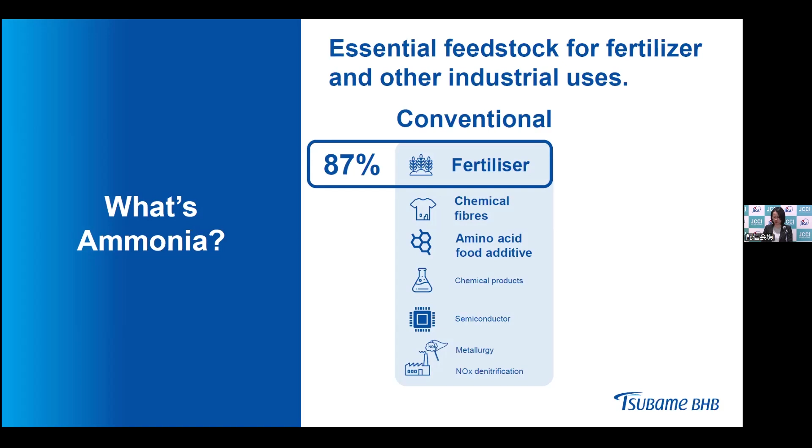But now, ammonia is expected to play an important role for our world's decarbonization. Ammonia is expected to be used for maritime fuel and power generation, as it doesn't emit CO2 when combusted. It is also expected as a high potential hydrogen carrier for the decarbonization of so-called hard-to-abate industries.

The world population reaches 9 billion in 2050, so we need more fertilizer and more fuel, which means we need more ammonia. However, the ammonia industry has 2 issues: its production is now limited to fossil fuel-rich countries, and there is a significant amount of CO2 emission in its production.

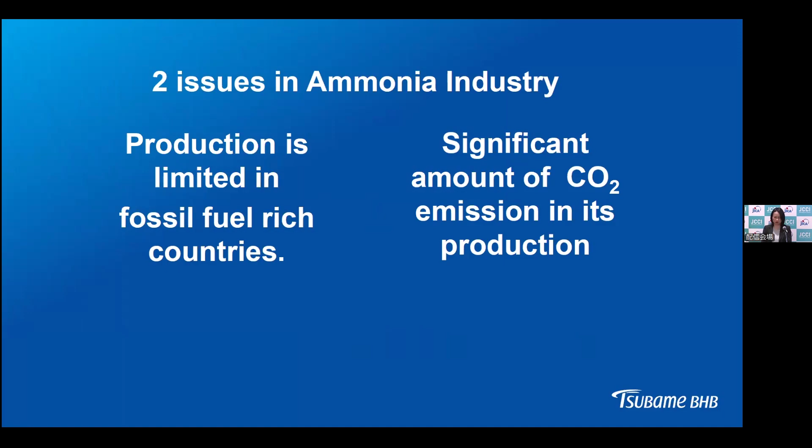The other big issue is that current ammonia production is from natural gas or coal, therefore it emits a significant amount of CO2. We have 380 million tons of CO2 emissions every year, and that accounts for 1 to 2% of the world's total CO2 emission.

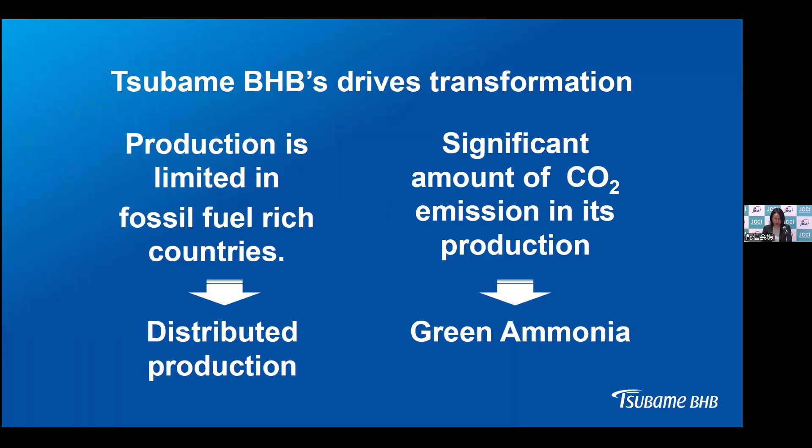To tackle these issues, Tsubame BHB drives transformation of ammonia production. The keywords are distributed production and green ammonia. So I would like to talk about our core technology, how we are going to achieve our vision.

Our core technology is an innovative ammonia synthesis catalyst named electride catalyst. Electrons contained in the catalyst perform as negative ions, and it enables ammonia synthesis at lower temperature and pressure compared with conventional technology. Ammonia synthesis under mild conditions has high potential to reduce energy consumption and plant cost.

Using this unique technology, we offer flexible ammonia production responding to the client's needs. For those with relatively small demands, less than 100,000 tons per year, we offer a distributed modular type ammonia production system, which we are mainly targeting for fertilizer local production or industrial uses.

The photos here are our first modular system for 500 tons per year production, which is now under installation. For those requiring large-scale production from 100,000 tons and above, for fuel and energy purposes, we offer a catalyst and basic design, which we target to launch in 2030.

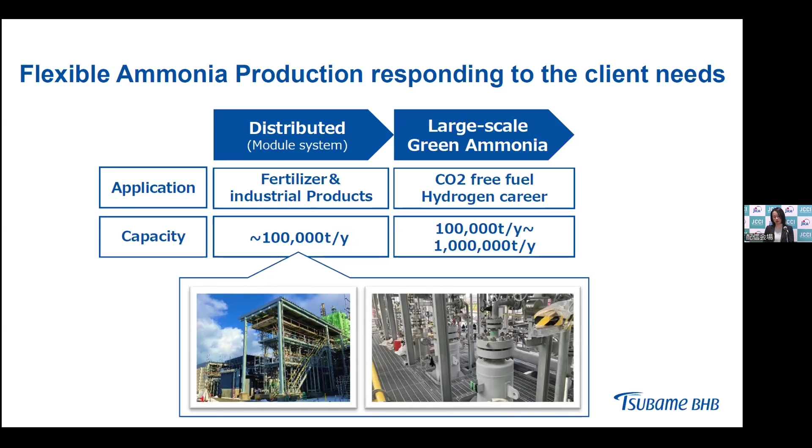Today I would like to introduce our low-carbon fertilizer production model. We generate hydrogen from water and nitrogen from air, then synthesize ammonia using locally available renewable energy. Then we transform ammonia into fertilizer in whichever form is required in each country.

Anhydrous ammonia direct application is common in North American countries, but the rest of the world prefers liquid or particle type fertilizer. This is the image of our low-carbon fertilizer plant. You can visit our VR plant from our website, using the QR code here.

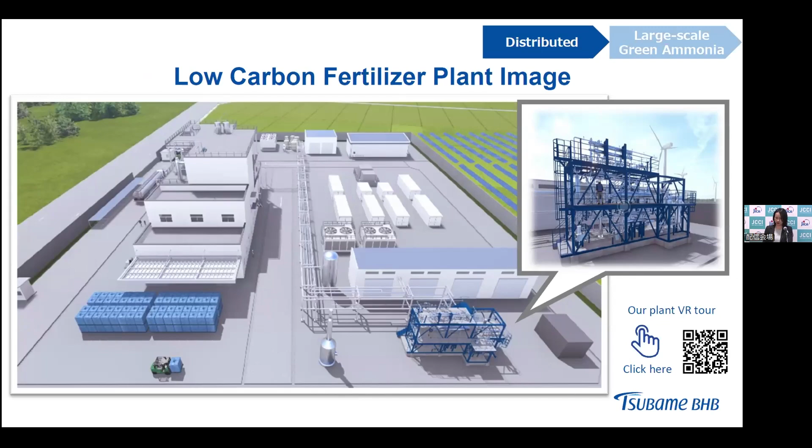Our flexible and distributed solution enables ammonia and fertilizer production in the demand area. So we can mitigate the client's global supply chain risk and also contribute to significant CO2 emission reduction in long-distance transportation.

Also, producing ammonia with locally available renewable energy, we can graduate from fossil fuels and reduce large amounts of CO2 emission from ammonia production.

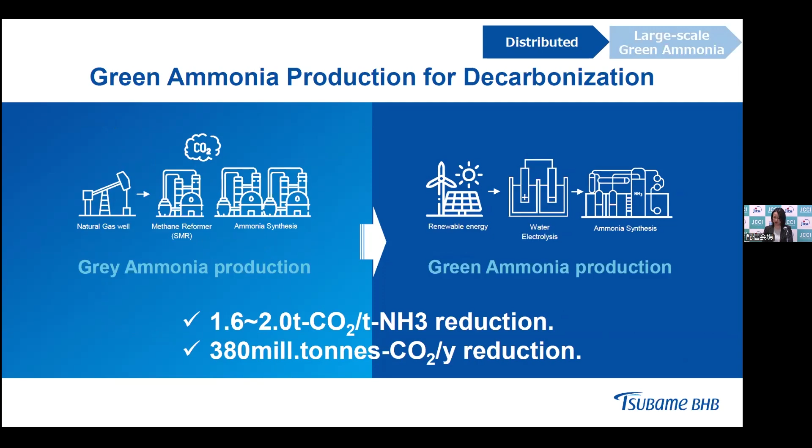So far, we have already received 2 commercial plant orders in Japan. EPCs are ongoing, and the first plant will be on stream in August this year, with the second one following 1 year later.

We have many project development discussions with global partners, so we are very happy to be connected with partners to develop this low-carbon fertilizer project in your country. Thank you for your attention.

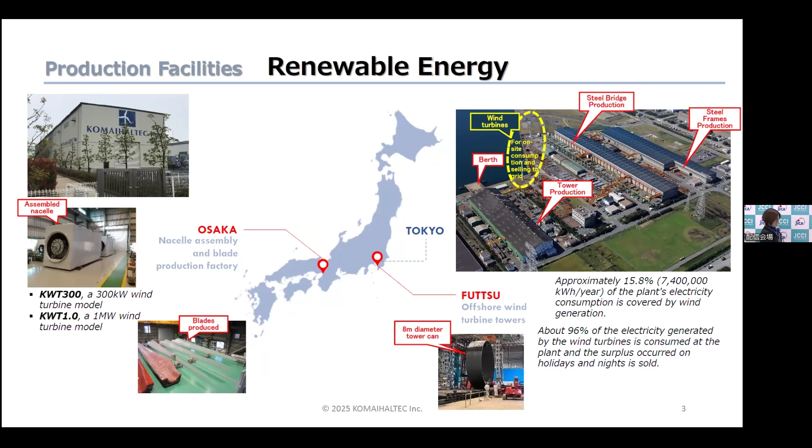Our energy business is based in Futtsu, Chiba Prefecture, and Osaka. In the Futtsu factory in Chiba, we manufacture materials for bridges and steel frames, and we have renovated part of that, and are now building a production line for offshore wind turbine towers. In Osaka, we manufacture mid-sized wind turbines.

This is the introduction of our products: the 300 kilowatt wind turbine models, with three different options. The first is for normal climate, the second is for cold climate, and the third is for typhoon areas. Rotor diameter is 33 meters, hub height is 41.5 meters, and nacelle weight is 18 tons - small size.

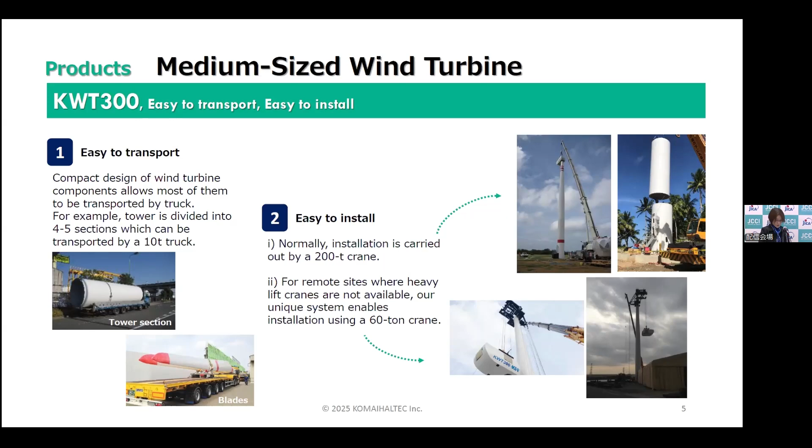We have strong winds in some parts of Japan, and roads can be quite narrow, so we make products and parts that are easy to transport and install. For example, this tower can be separated into 4 sections, making it easy to transport. Installation usually requires a 200-ton crane, but we have developed our own self-lifting system. Using this, you can install the wind turbine using a 60-ton crane instead.

In addition to the 300 kilowatt model, we have developed a 1 megawatt model. We know that the size of wind turbines is getting bigger, and for on-site power generation, demand is growing for wind power, so we believe the 1 megawatt wind turbine has a big market.

Again, we have the typhoon-resistant type, able to withstand winds up to 91.26 meters per second. We are prototyping now, and expect commercialization from 2027.

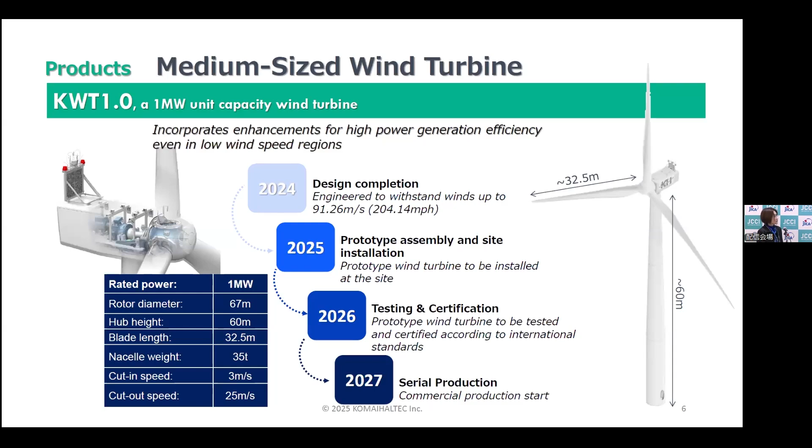This one is in Kanagawa Prefecture, Miyagawa Park. Wind power is used to power the lighting at night, and this is also a landmark for the local residents.

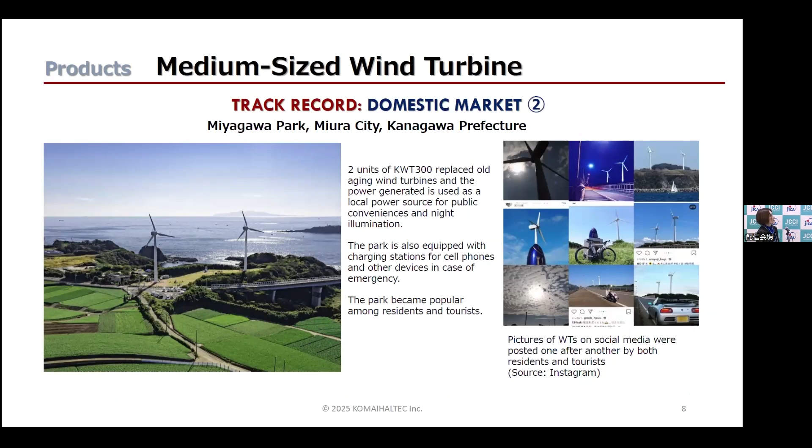This is an overseas example, two examples in extreme cold weather. Fuel transportation can be very expensive, so combining renewable energy with diesel fuel power generation can achieve very stable power generation at a lower cost.

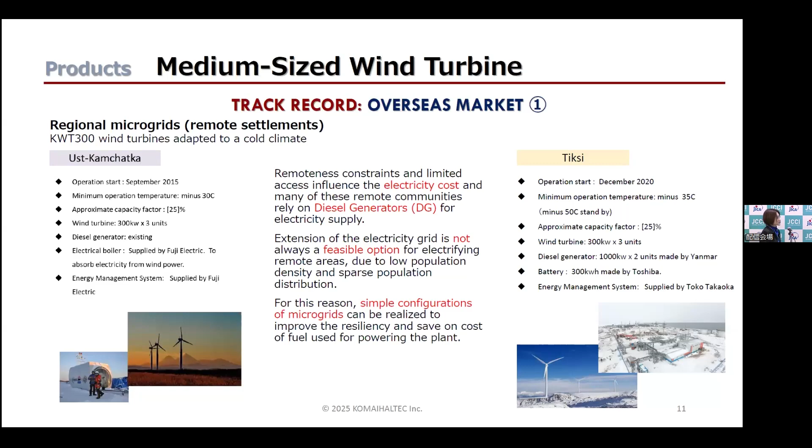These different sites require various types of solutions depending on the scenario and situation, and we can be flexible.

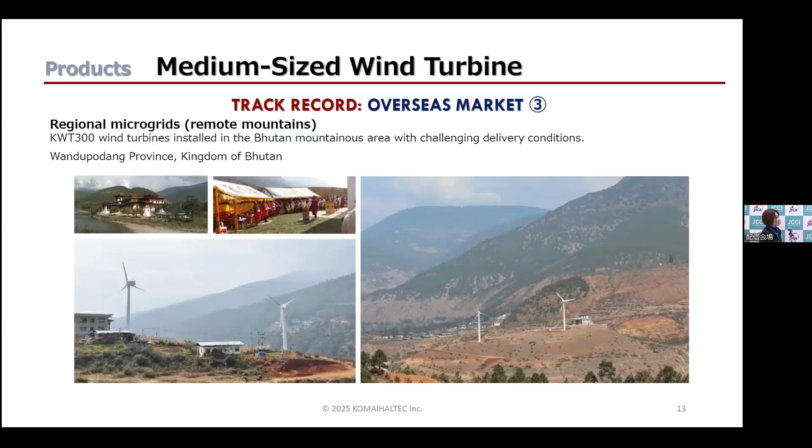ADB financed this project in Bhutan. Very narrow roads lead up to this small village in the mountain area, and they had to carry the parts and components for the wind turbines up there.

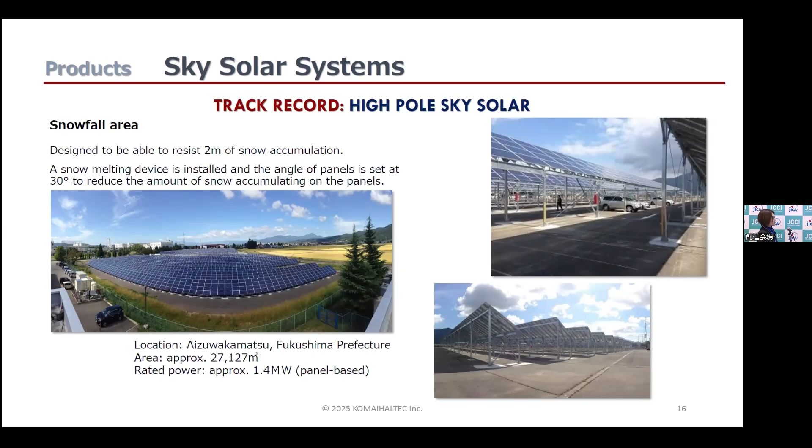This one is in Fukushima Prefecture, a parking space equipped with a solar system. There is a lot of snow in this area, so we have changed the angle of the solar panels to ensure it can withstand the snow, and there is also a snow melting device attached.

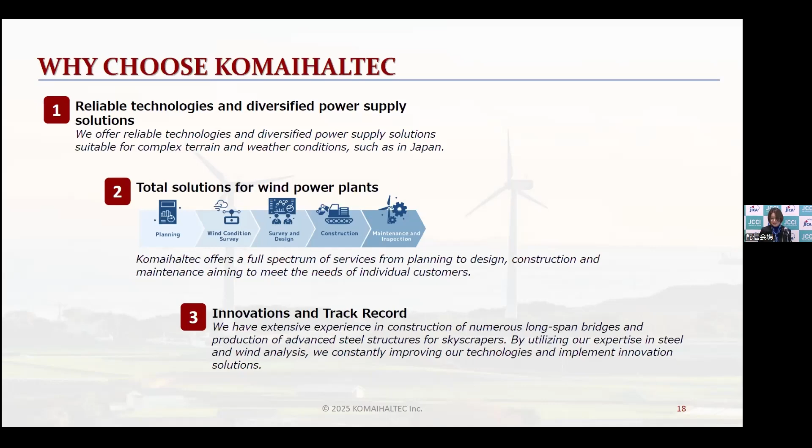As you can see, we provide a whole variety of different systems and solutions suited for each situation of our customers. In planning, design, construction, maintenance, we can do everything. With regard to maintenance, we know that some customers prefer doing maintenance locally, in which case we can also provide services to educate the local player to do the maintenance as well. If you're interested, please let us know.

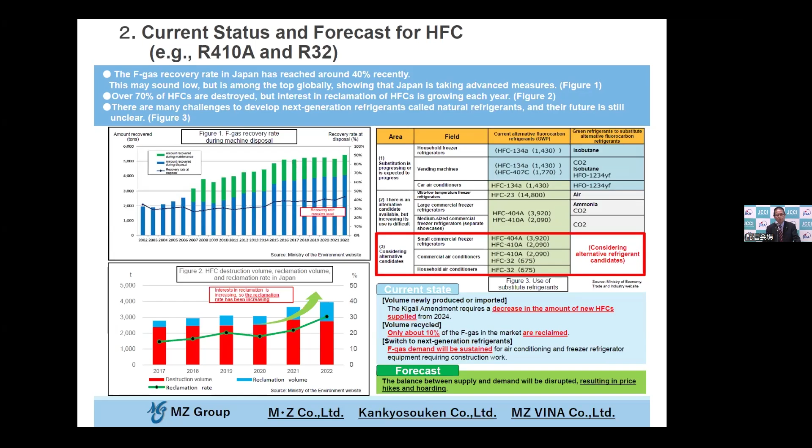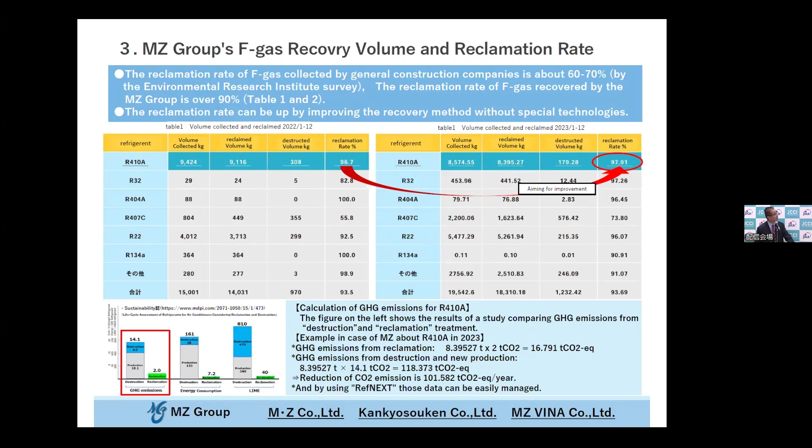So this is from the reclamation, utilization of the collected, recovered fluorocarbon. So F-gas, you collect them in normal time at 60-70% collection by construction companies such as General Construction Company. But in terms of when we recover and reclaim, it's 98%, very high reclamation rate, the reuse rate, because the right procedure and right tools are being utilized. And through that, we have a high ratio of F-gas being recovered and reutilized.

And this is just a reference. F-gas: collecting, recovering, and then reclaiming. The reclaimed F-gas, what's the situation? How much is being used? This is traceability, and we need to manage them.

So our company has a system called RefNext. Utilizing RefNext, the F-gas could be managed from recovery to reuse to being reclaimed. So if you're interested, please let us know, we will be able to share with you how this system works.

And following that, this recovery or collecting is important. Unless you recover them well, the reuse will not go up. So this is the content of the procedures that have been undertaken. It's in English, so it may not be clear, but for us, the ISO 9001:2015 is a certification that we have been certified with. So at all times, we analyze the content and then try to reclaim them.

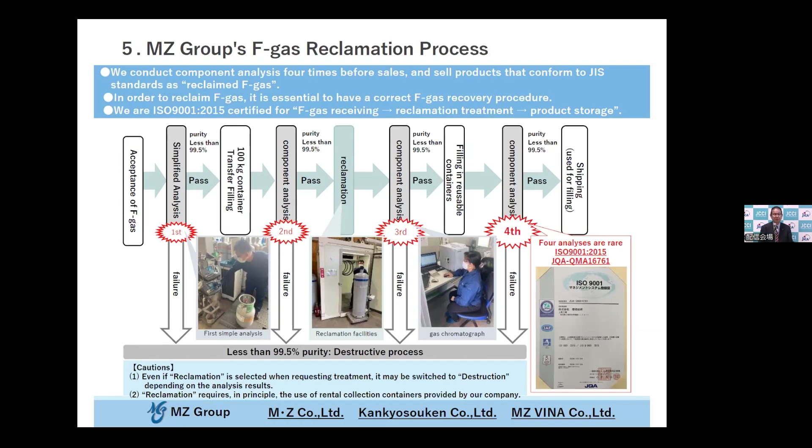So that will be the basis of the reuse. As you can see, it's small, but 99.5% we are now utilizing them. So for the reutilization of F-gas, there may be a concern about the quality of the F-gas, but for us, 99.5% and above, the fluorocarbon gases we would be able to reclaim or reuse.

So these F-gas and reuse of that overseas, for developing countries where F-gas is left without being collected, we also like to run an initiative outside of Japan. In Vietnam, Ba Ria-Vung Tau Province, we have a new company that we have established. So F-gas, as you can see, the customer brings to us the non-already used F-gas. So we visit a customer and we collect F-gas. First of all, it's collection of F-gas, and then, as I explained, the reuse technology nurtured here in Japan, we try to reuse them.

And also, last but not least, our collection of F-gas is a theme of our business, but alliance with the stakeholders or parties involved is essential. So at the beginning, when you think about collecting F-gas and the consumer, and collecting the F-gas and delivering the goods to us, we want to make the F-gas reusable.

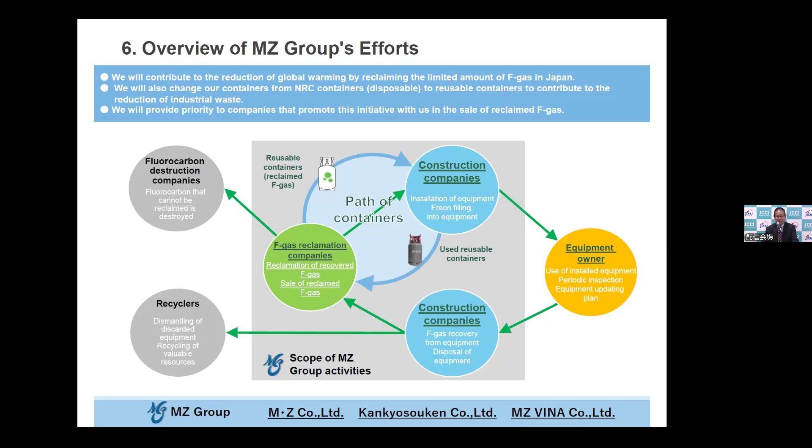So for us, in terms of the F-gas that we're going to reuse, these are the efforts that I would like to have you join on the journey, so that we'll be able to share and feedback the F-gas that could be reused once again. It has been very brief, but if you have any questions, please feel free to reach out. We have emails and home pages available. Thank you very much. Thank you once again.

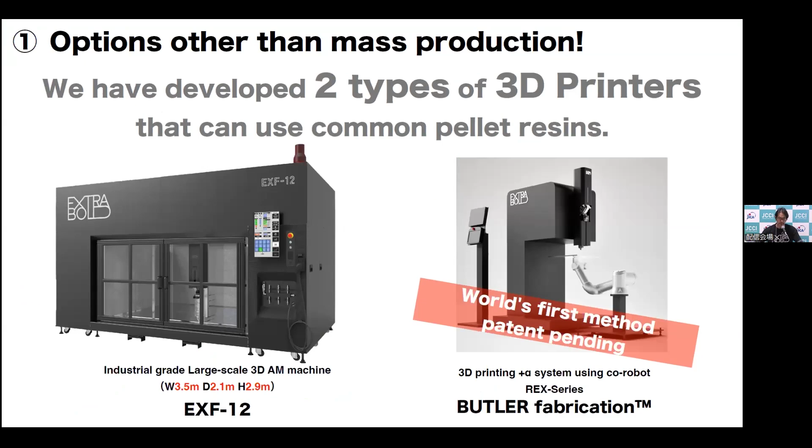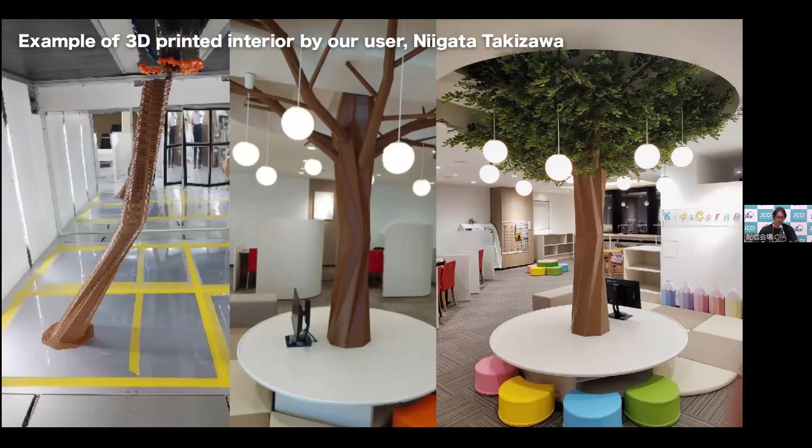This is our EXF-12 size, extra large 3D printer. The world's first collaborative robot-based 3D printer has been developed and is being sold by us. It's fast, offers a choice of different materials, and you can make something big. Last year in Thailand, our printer was used to make material for parts of a racing car by Toyota, and our materials are used for interior structures, organic-looking interior structures, for example, and also very sleek-looking walls can be made by 3D printer.

Everything can be recycled, so you can combine it with a recycle machine and use our printer, and this kind of recycling is already being achieved. This is a reality already today. Organic waste and recycled materials can be used to make new materials. I'll skip the difficult part, but we have level 1, 2, 3, 4, different levels of material making. Let me explain one by one.

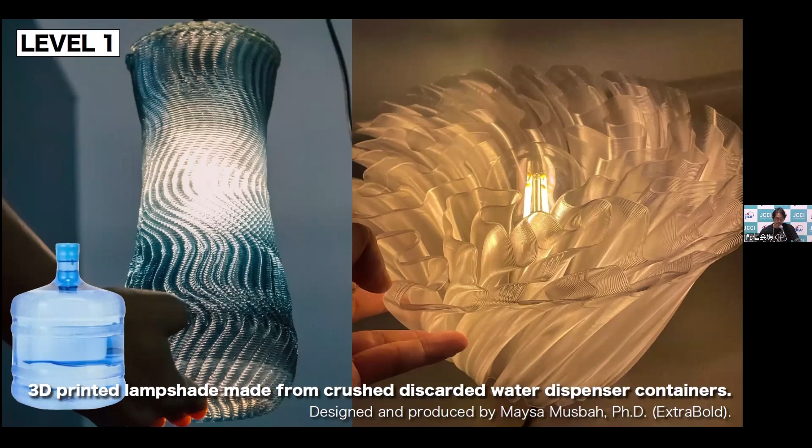First of all, we have level 1. Water server tank, these big plastic bottles, can be pelleted and turned into something else, like this very fashionable looking lampshade, designed by our own engineer/designer. Imabari City is using our technology, including our printer. Road cones, these triangular cones, can be pelleted and turned into Christmas tree ornaments. One ornament can be made in about 2 minutes.

Another example: if you have in-house waste within the company, when we make something in-house, what we make is provided free of charge to the employees. We use marine waste like this, in this case mandarin skin. When this is turned into powder, you can actually mix it with other materials. Anybody can do this, you don't have to be an expert.

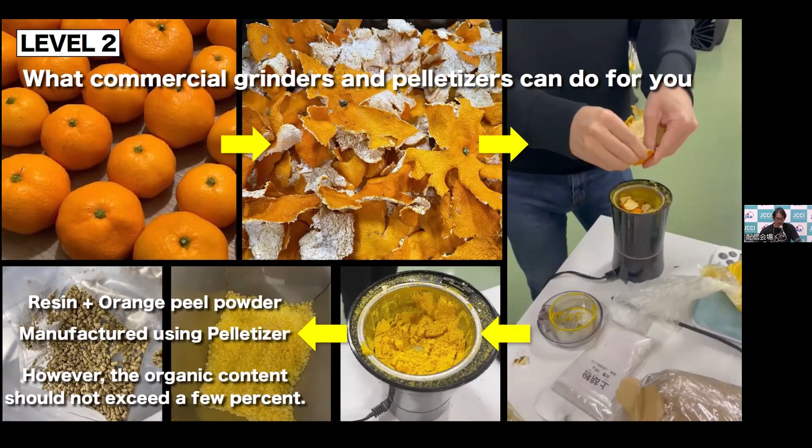So students and employees try to find more different materials for recycling and upcycling. This is something we tried with Toyota last year, where all sorts of different residual wastes are included, for example Lego blocks from your childhood, which means each material can have a story for different individuals, so the product made from the material definitely has higher value. That's level 2.

A Hiroshima City University student made this in 2 days from marine waste and wood waste. So manufacturing and creativity, if the young generation these days can master both, they can be really creative.

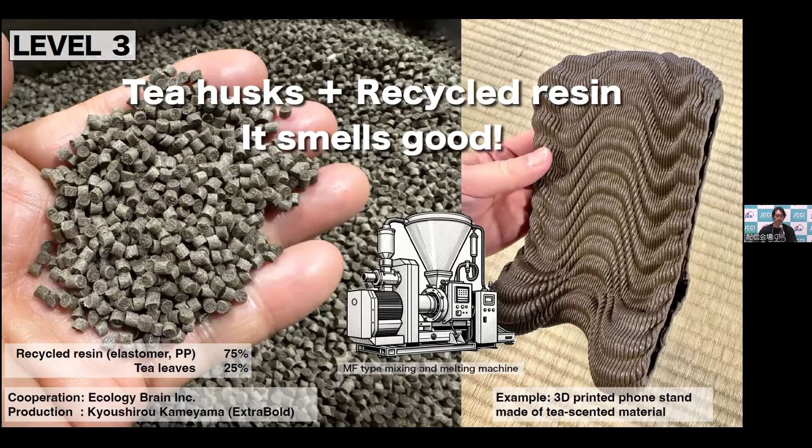This is MF fusion, a Japanese technology that mixes different materials with plastic at high melting point. In this case, used tea leaves are used, so you can smell tea. If you use coffee grounds, you can smell coffee out of this, another added value. You have no idea what's here, but this is a CD, DVD case, and also wine residues. You can mix all these different materials and manufacture chairs.

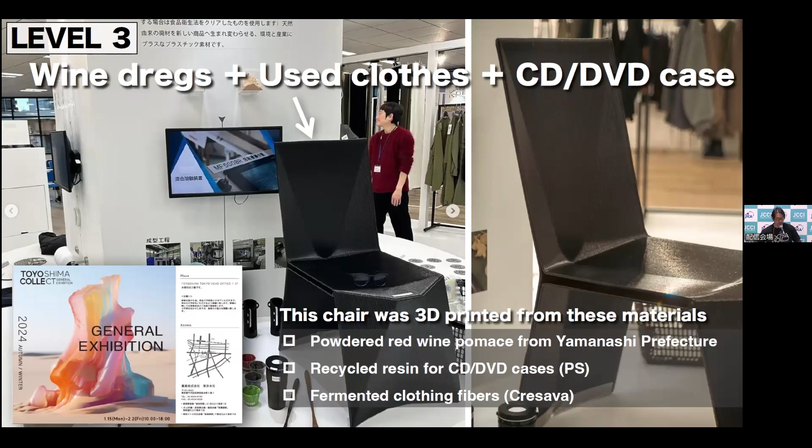So material technology and 3D printing technology combined. More recently, I don't know how it is right now, but Japan has great technology, and we're working with that startup. CO2 can be turned into charcoal, and 60 to 70% of the CO2 can be captured.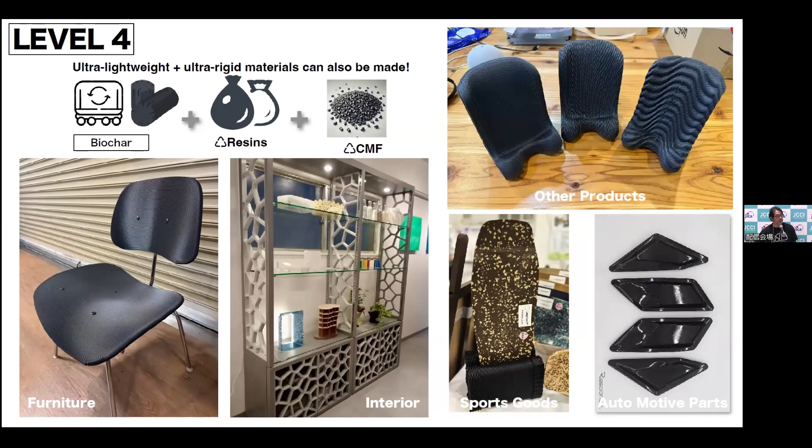Plastic waste and food waste can be turned into biocharcoal, and you can also generate power through this process. You can use CMF, cellulose microfiber, and make a combined material. This is a type of plastic that is more resistant or stronger than traditional plastic. So we are trying to introduce more added value for social implementation while moving away from just 3D printing.

A large general contractor is working with us in Thailand for this. Biochar is made, and then you can mix it with concrete, which absorbs a lot of CO2. I didn't know that concrete actually emits a lot of CO2, about 80% of its volume, but using this process you can reduce the CO2 emission.

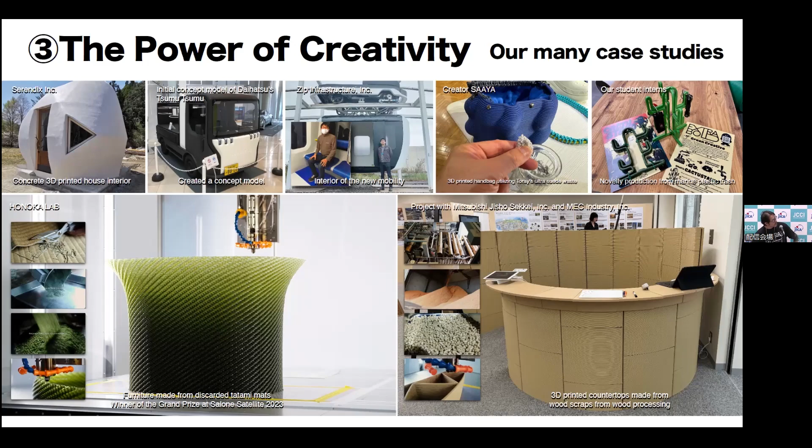Various demonstrations have been done through the power of creativity. A concept model for a car OEM and a startup making this kind of interior materials, this green thing for example, this is a beautiful product, I'll talk about this later. And also wood chip based interior, this is a counter table using wood plastic by Mitsubishi Jisho Sekkei.

With a concrete 3D printer you can actually make a house within 1 day. But if you try to do the interior, it could take 6 months, though we can make it faster. And this is the product. These are the 3 members of our company.

Milano Salone is like a global design competition, and they won. And all of them left the company, and they're independent, but they're working with us now.

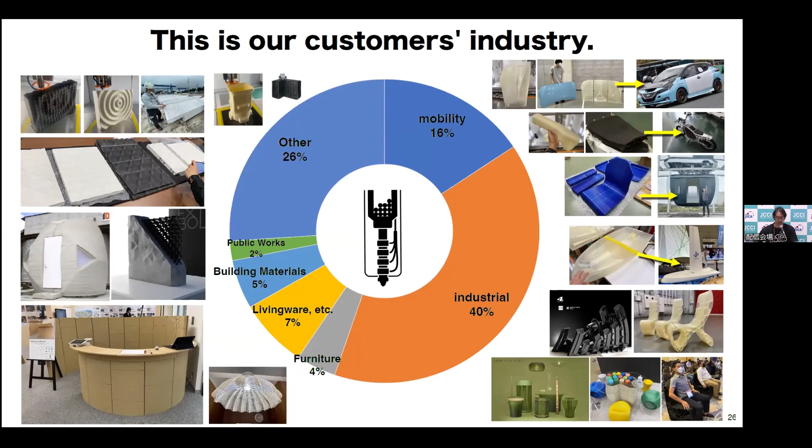So sustainable technology plus printing innovation, you can do this much by this combination. We want all the different industries to know about our technology, and we want more people to know about this technology so that we can together create more sustainable products for the world.

Global South Aid, the grant, we obtained that the other day. Japanese technology can be brought to Thailand to solve environmental issues and change society with the power of creativity. We already have some customers already.

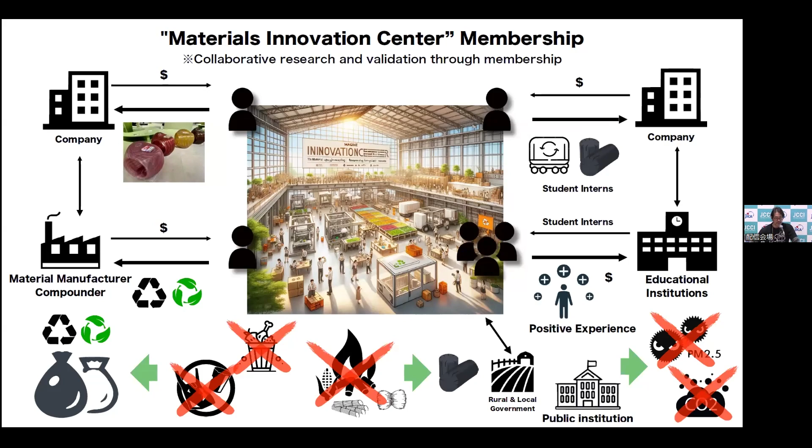This is a membership model. The companies will come to this site and use what's available there, and we will do different types of demonstrations with these companies. In Thailand, if you want to make an interior piece for example, you don't have to comply with the fire code, so it's easier to try this in Thailand and bring it back to Japan. So we will make this material center in Thailand.

In Thailand there is a Takashimaya department store, and last year we had a 3-week event. We brought our 3D printer and did demonstration, manufacturing, and selling of the products on site. I would like to show you the video, it's about 1 minute.

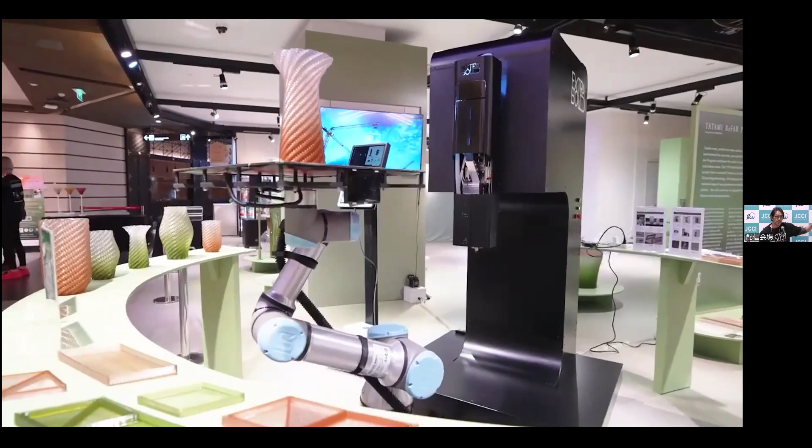This is made from residual material from tatami mats and biodegradable plastic as well. Very expensive, but we sold many. Even a small vase like this would cost 20,000 to 80,000 yen, but they sold very well in Thailand.

We had famous people from the embassy, and a very famous actress from Thailand, and because of that actress this campaign was helped a lot.

We want to mainstream the tools for solving societal issues without making it too difficult or too academic for people. And we are looking for financing partners as well. That's all for me, thank you.

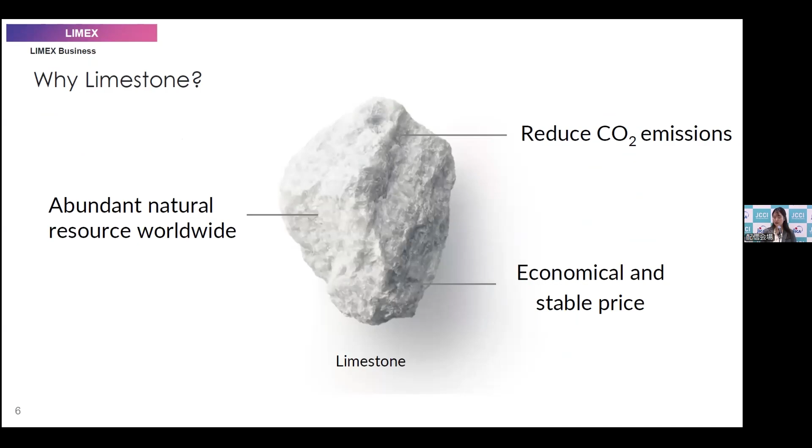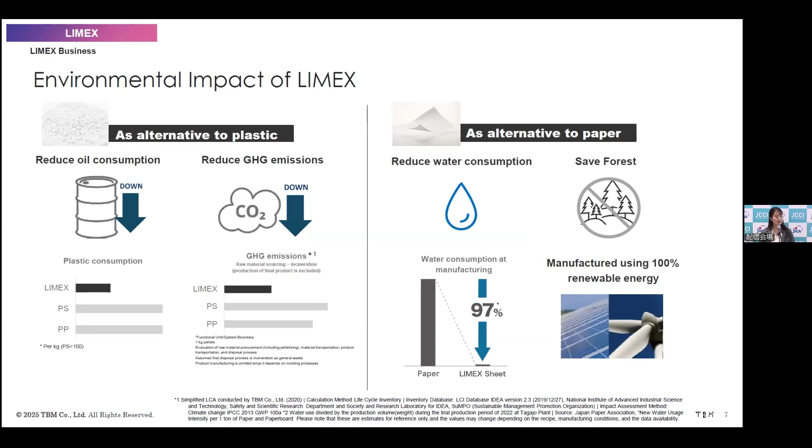Limex has been introduced to more than 10,000 companies and municipalities in Japan. So I think many of you have already seen these brands and companies. Actually, Limex is everywhere.

It's not only in Japan, but we have global symbolic cases of Limex. JCDecaux, a French advertising company, adapted Limex for their backlit signage. Liwayway, famous for its Oishi brand, is using Limex for flexible packaging. And Big C, a Thailand supermarket, also adapted Limex baskets.

Here's a new topic of Limex. At TBM, we are excited to announce that TBM succeeded in developing the next generation Limex. Its brand name is CR Limex, which stands for Carbon Recycled Limex. Carbon Recycled Limex is a low carbon material that promotes carbon neutrality.

Conventional Limex uses calcium carbonate derived from minerals. But CR Limex replaces it with calcium carbonate that is chemically synthesized from emitted CO2 and calcium-containing waste, such as concrete sludge or steel slag from factories. Together with CR Limex, TBM is taking the next step towards even more sustainable manufacturing.

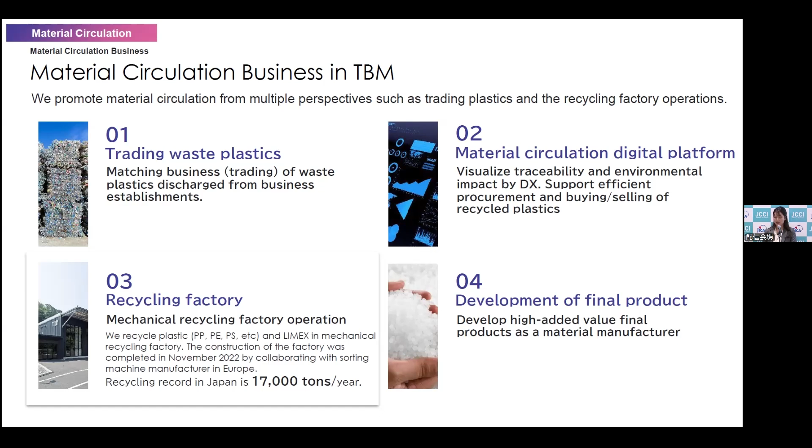At TBM, we have our own service to visualize traceability and environmental impact through DX, supporting efficient procurement and buying and selling of recycled plastics. The third is our recycling factory, which I'll explain in more detail later - we have a mechanical recycling factory in Japan established in 2022. It's been only 3 years, but we already have a recycling record in Japan of 17,000 tons per year. Finally, we also develop final products with high added value.

Here is the explanation of the Yokosuka Circular Factory in Japan. This is the world's first plant to collect and sort general purpose plastics like PP, PE, or PS, and also Limex, for recycling.

The process is: we collect plastic waste from offices and factories, but not only industrial waste - we also collect waste from municipalities. We receive a plastic processing fee from those municipalities and collect plastic from households.

In this factory, here is the whole process: PP, PE, or PS is sorted automatically using European technology. In addition, Limex can also be sorted in this process. Sorted plastics are crushed and washed, and also separated depending on their specific gravity.

Finally, there are 5 pelletizing lines in this factory, where an automatic self-cleaning screen changer can remove contaminants. Our recycling plants in Japan adopt a dual income system, receiving plastic processing fees from municipalities and revenue from selling recycled pellets.

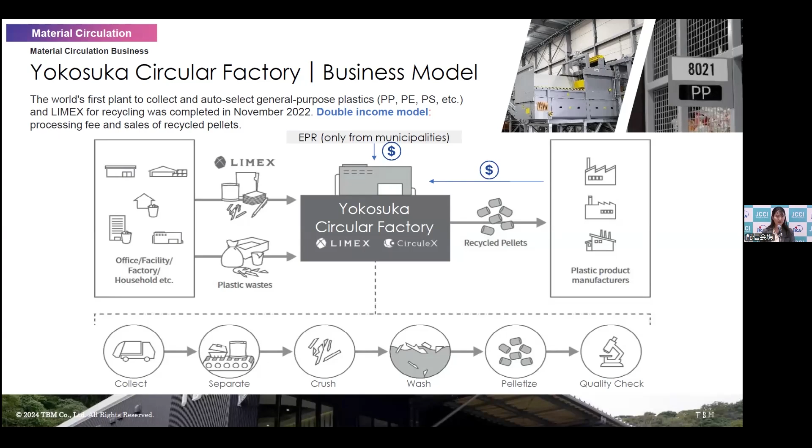Understanding that not all regions offer municipal support, TBM is taking a different path. With our cutting-edge Limex technology, we are enhancing the value of recycled plastics and driving sales to build a self-sustaining business model. We are looking for visionary municipalities to collaborate with us on this journey towards a more sustainable and financially independent recycling ecosystem.

TBM launched the Resource Recycling Council as an organizer. We understand that we cannot achieve the circular economy by ourselves, so we need more cooperation with other entities. Together with more than 190 members from corporations, startups, financial institutions, and governments, this Resource Recycling Council will carry out policy recommendations and the social implementation of the circular economy.

At TBM, we realize the sustainability revolution with you. Thank you so much for your time.

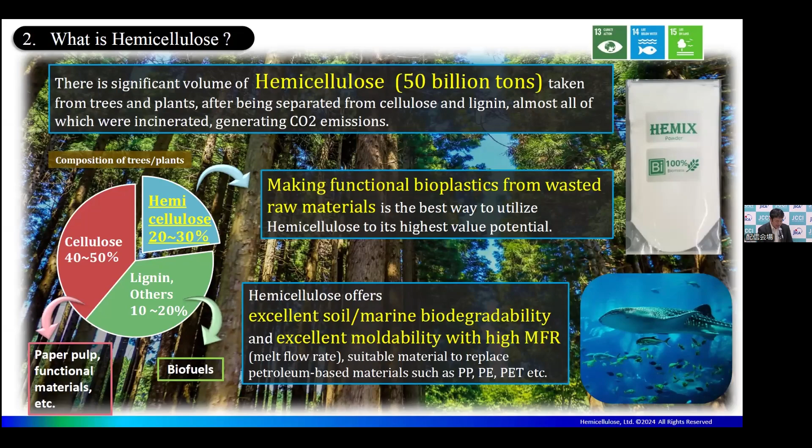About 50 billion tons of hemicellulose is emitted or wasted globally. So we wanted to utilize that. In terms of soil and marine biodegradability it's excellent, and it's also excellent in terms of molding. It is easily molded. There are three social issues that we need to solve.

50 billion tons of hemicellulose is produced. Maybe by utilizing this we can stop global warming. Second is food loss in urban areas: food waste and also waste coming from food factories. This is high in volume, and using our technology we will be able to reduce these wastes.

Thirdly, in rural areas there are sometimes husks and residues that are basically byproducts of agricultural manufacturing, which are usually discarded, but we believe this is also a natural resource that we can take advantage of.

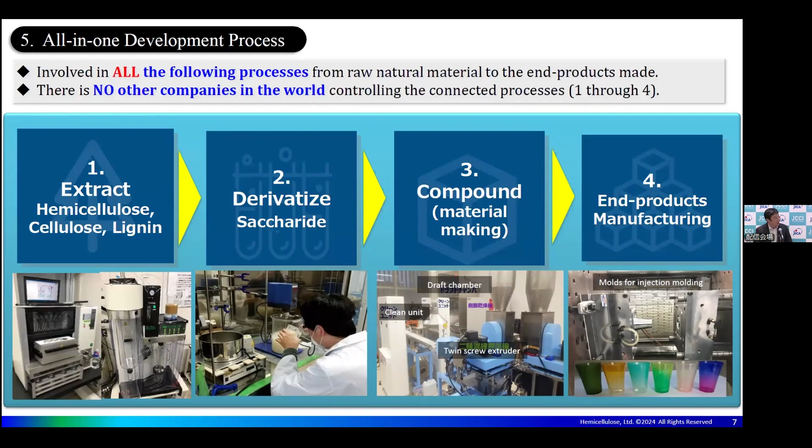Agriculture, chemistry, biology, molding - we need different types of experts and engineers to work on this. We established a process to develop products from plant extracts, including chemical reaction, formulation, compounding, everything. We are an original agri-tech company, because each plant is unique, and for each uniqueness of the compound or substance we have different ways of dealing with that, different processes.

Cacao, coffee, barley, wheat, corn cob, and bagasse - we have different processes for each.

So 100% plant origin, biodegradable, friendly to environment, and also very highly functional, for automotive use for example. In this case we combine with a petroleum-derived material as well. We also provide, we are developing fibers and textiles. 100% natural is not really available, but we are trying to achieve that.

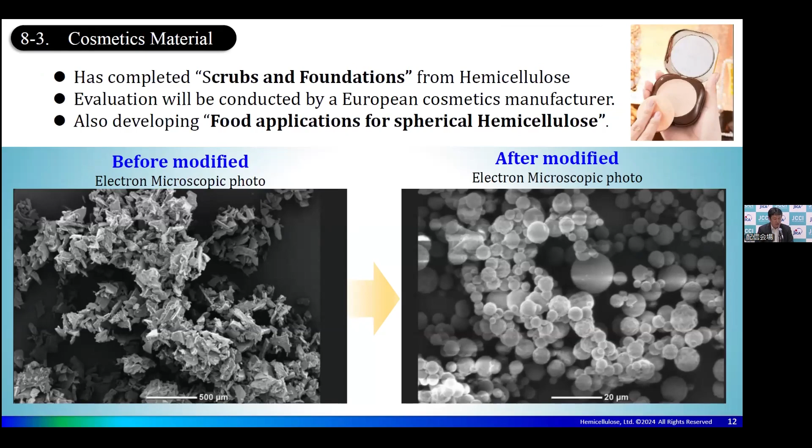Foundation in the cosmetic industry is causing problems in the ocean with microbeads, but we are developing something that is an alternative, which is more natural. CO2 reduction is about 30 to 60% higher compared to fossil fuel-based materials.

Now, marine biodegradability: within 1 month, 90% or more can be degraded at the fastest. But we also have technology where we can retard that degradation as well.

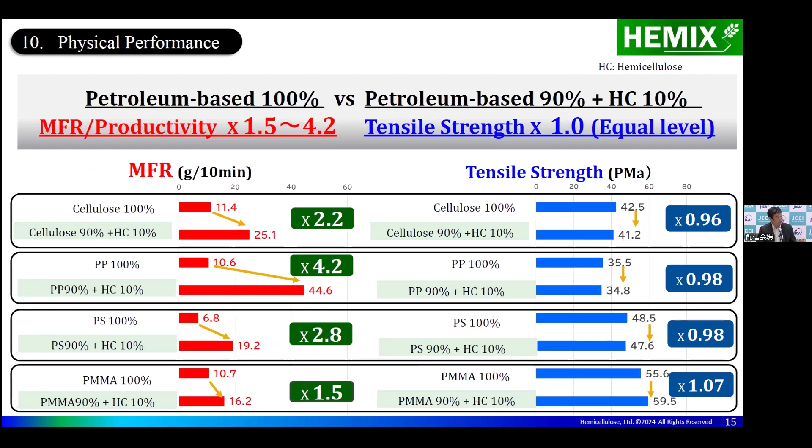Ease of use, ease of manufacturing, and strength and heat resistance similar to fossil fuel-based material would be required for commercial use. So we are also working on those aspects.

We develop in-house, we're very quick, and also we have a variety of approaches for different types of materials with only small capital investment necessary.

In Ecuador, South America, the Amazonian forest is being depleted, but in order to stop cutting the trees, we were asked to make use of the seeds rather than cutting the trees, including an aspect of donations.

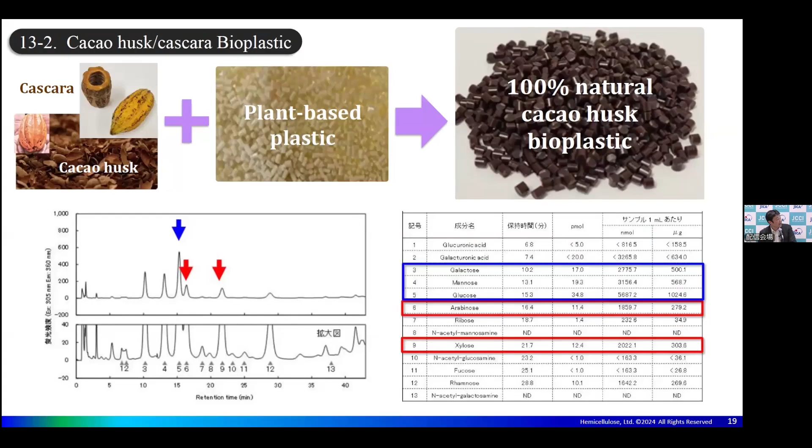This is expanding. Cacao is another global issue. Cacao is used for chocolate, but only 5% is actual cacao - the remaining 95% is husks and waste, which we are trying to turn into useful materials for different characteristics needed for different products. Sometimes I need to make the material very thin, sometimes very thick, sometimes very strong.

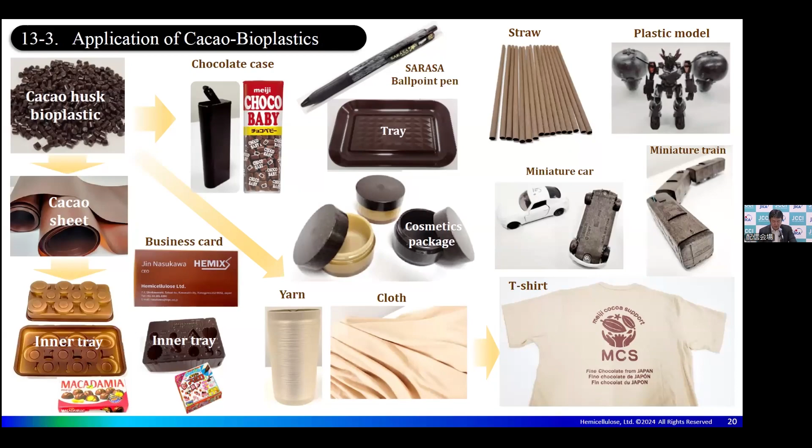So we are going beyond the world of chocolate. We are going into toys, ballpoint pens, apparel, and others.

We have a global cacao initiative. Ghana, Ivory Coast, Madagascar - these are the producers, and also poor countries. In order to make them richer, they could manufacture this material locally and then export to Europe, for example. In South America, they can manufacture locally and export to the United States.

So that's the overview of the company. TICAD 9 in Yokohama - we will be doing some presentations there as well. So please look forward to that, and thank you for listening.

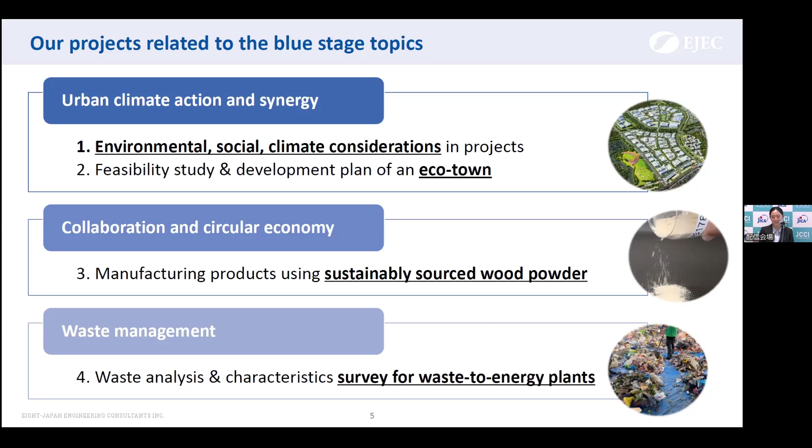Now let's start with environmental, social, and climate considerations projects. Every year, we implement multiple civil engineering projects. Many of our international projects are commissioned by JICA, which is our host today. In JICA projects, we follow JICA's guidelines and procedures to ensure environmental, social, and climate considerations.

This is an example of the Nagdhunga Tunnel, the first mountain tunnel ever made in Nepal. It connects the capital city of Nepal, Kathmandu, to neighboring cities. In Nepal, increased heavy rainfall due to climate change is causing frequent landslides, which lead to severe road closures. The Nagdhunga Tunnel is expected to be used as a means of transportation not affected by such natural disasters, while also improving traffic congestion and reducing accidents. It will increase the resilience and connectivity of cities while contributing to the economy of the area.

EJEC was involved in most of the project period, from reviewing the initial alignment plan of the tunnel to the survey, design, and construction supervision stages. In the survey stage, Otani-san, who is sitting here, conducted the environmental and social consideration survey and ensured that groundwater compensation for agriculture and local residents was given.

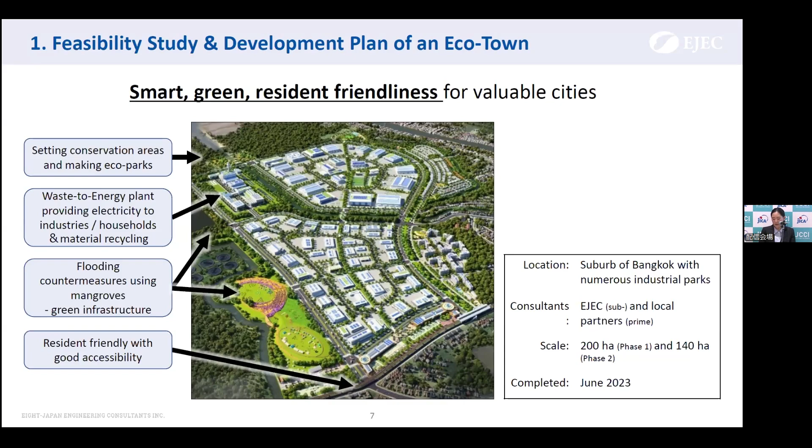Next, related to collaboration and circular economy, I'll introduce EJEC's subsidiary company, Naka Wood, located in Nakacho, Tokushima Prefecture, where the forest coverage rate is 95% and the planted forest rate is 78%.

Naka Wood owns and operates a wood collection station and processing plant in Nakacho. Through the utilization of wood and environmental education activities conducted in collaboration with various stakeholders, including the local government and local businesses, Naka Wood aims to conserve the natural environment, enhance national land conservation functions, and realize a sustainable circular society.

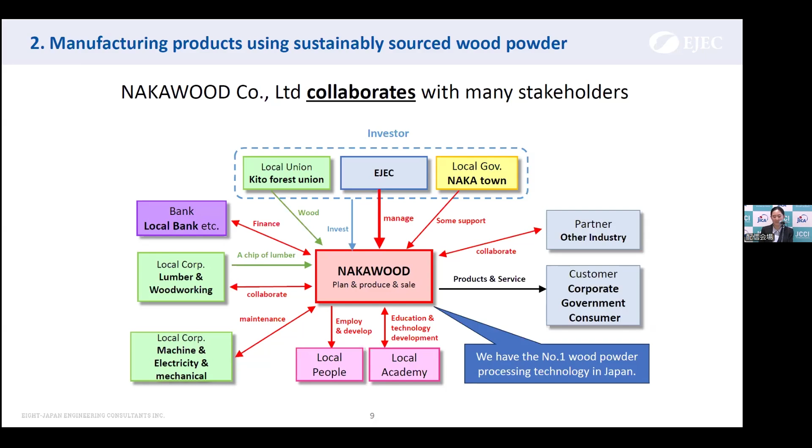Naka Wood makes wood products such as cutting boards and surfboards using locally sourced wood. Naka Wood also makes wood powder, called mokufun, by grinding locally sourced discarded timber and thin wood. The wood powder is used to make products such as bioplastics and portable toilets.

By replacing materials with wood, we can reduce carbon emissions. Also, by using wood, we can vitalize the local forest industry. And with more forests being managed, floods and landslides in the area can also be reduced.

Naka Wood also conducts various environmental education activities and trainings for children to adults. Recently, JICA trainees from Nepal visited Naka Wood to learn about sustainable forest management.

This is the final case study I'll show today: EJEC's Solid Waste Management Division. Our Solid Waste Management Division supports local governments in all stages of waste management by providing services such as master planning of waste management, facility concept design, public-private partnership (PPP) or private finance initiative (PFI) applicability studies, procurement advisory, supervision of design and construction, and operation monitoring.

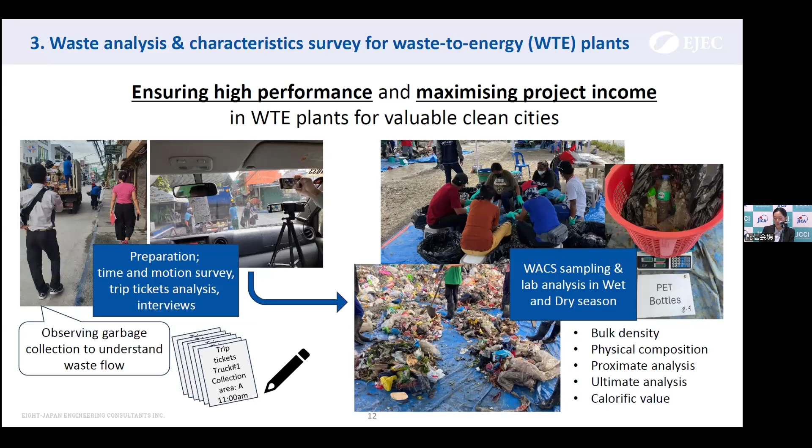In Japan, WACS studies are conducted regularly, even in existing facilities. We believe that as more countries consider waste-to-energy plants, such surveys will be required all over the world, and EJEC is willing to support these future WACS projects overseas.

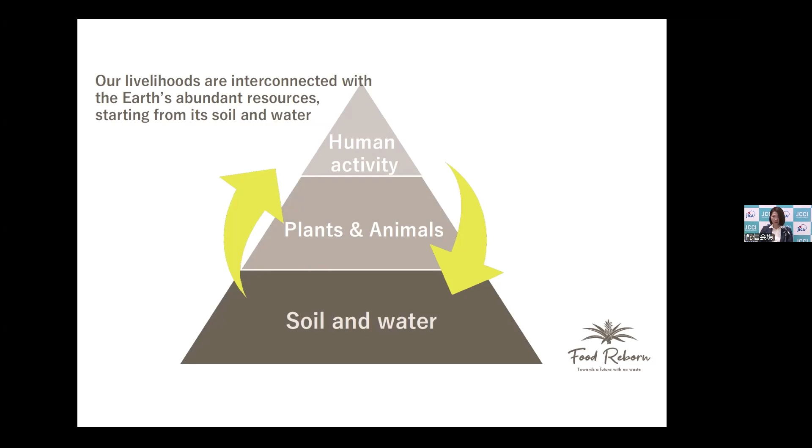Our livelihoods are supported by soil, water, plants and animals. But currently there is constant shortage of water and nutrients. We have to change our mindset to change this situation, and recovery of the Earth's environment is the biggest challenge.

Unused materials and resources need to be utilized. We want to change people's mindsets and awareness through these activities and recover the strengths of nature. Leaves of pineapple plants are unused, unutilized, so the first thing we wanted to do was utilize this. This is the project overview.

We have developed fiber extraction technology, saccharification technology, enzyme extraction technology, and tanning line technology. We have a comprehensive circular model. Water jet is used to extract fiber, and based on this technology we have created many valuable products. We also use residue from the fruit as well.

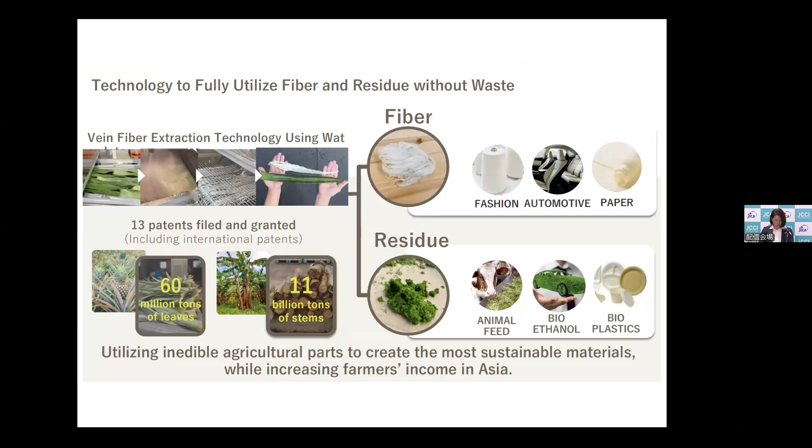This helps farmers become more independent and industries use reusable materials. So fiber, bio-based materials, and cycle are the three aspects of our business. Fashion, food, railroad, hotel - we are collaborating with all sorts of different industries.

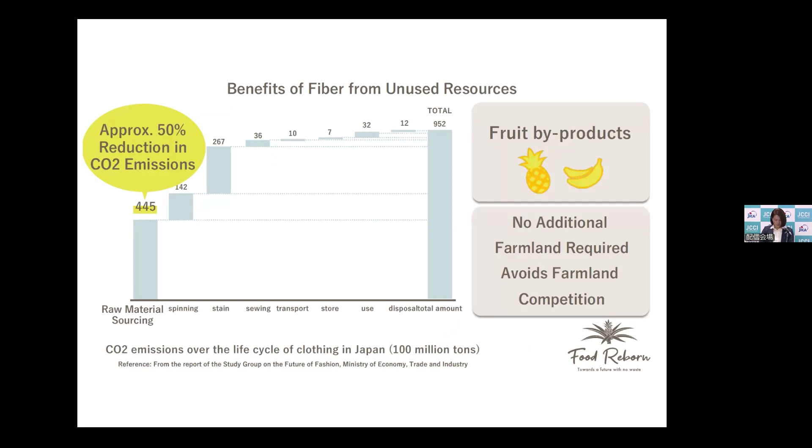In the life cycle of clothes, approximately half the CO2 is emitted during raw material sourcing. We use fruit byproducts to source the fiber, so there is no additional farmland required, and there is no competition with food manufacturing or food production.

There's approximately 30 million tons of global natural fibers. But if you look at unutilized resources such as pineapple fiber, there is again another 30 million tons. So this should be a meaningful option to use these unused or underutilized materials.

Linen flax fiber is mostly made in China and Europe. Needs are increasing, but the price is high and supply is limited. Pineapple fiber can be sourced in most of the southern hemisphere, including Asia, Africa, and South America.

Pineapple and banana fibers were used with traditional technology, but the quality was poor because only thick fibers could be extracted. Thin, fine fibers were lost, so it could only be used for thick materials. But we are able to extract thin fibers and thick fibers separately from the same pineapple leaf, so we can extract softer fibers.

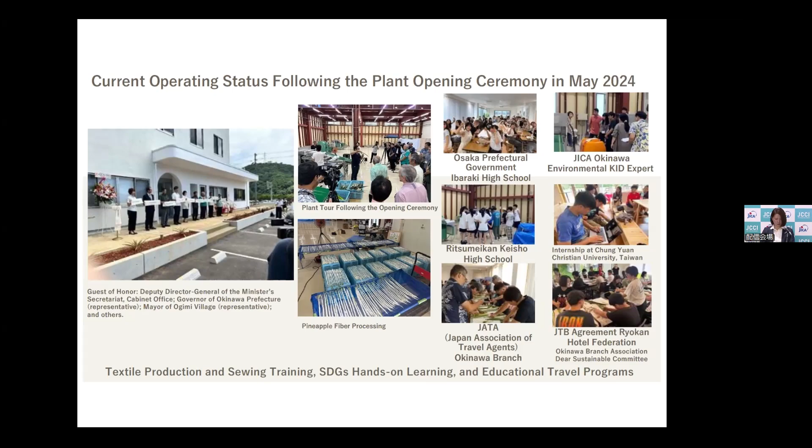That is the aim. Last year, we established the head office in Okinawa. This is a new site for business as well as education. Last May, when this was opened for the opening ceremony, many people participated. SDGs experience programs and training are provided from this facility to increase employment locally.

In Indonesia, we have started a plant. The fibers are extracted and then supplied to textile manufacturers. Young people who work here are proud and have a bright hope for the future.

At the Mangkunegaran Royal Palace, a king decided to introduce this program. The black jacket worn by the king, the royalty, is made from pineapple. Batik is a traditional industry, and the garments worn by the royal family will be made by the pineapple fibers provided by us.

In 1 year, a 1.5 times increase in revenue can be achieved. CO2 reduction and water use reduction can be achieved. So we can contribute greatly both for business and the environment.

We want to expand this program globally in order to solve societal issues around the world. This is the vision for the future. Up till now, we have been building the foundation, but toward 2030, we want to achieve 5% of the global natural fiber market. After Indonesia, we will go into the Philippines and the ASEAN region, and then Europe and the United States.

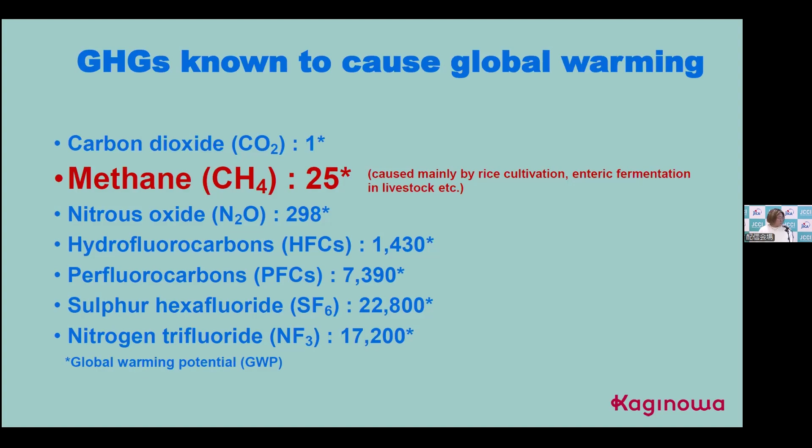So for us, it's something very close to our lives. The 25 times CO2 equivalent represents the massive significance and consequences caused by methane gas. Methane gas is emitted on a day-to-day basis, related to rice and crop farming and also livestock.

This expanding GHG emission leading to global warming has a negative effect on the ocean as well. The temperature of seawater will rise and have a significant effect on species under the water - rocky shore inundation, coral bleaching, and decrease in fish catches are also well known.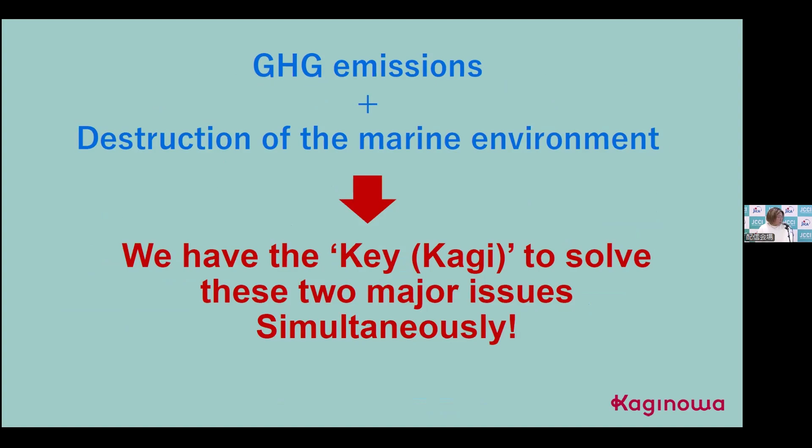The kagi, which means key, this is the red algae. It's called kagikenori, the name of a seaweed. So kagikenori has a characteristic.

Asparagopsis is the English name, taxiformis, a white sort of red-purple kind of herb. Its characteristic is a very small, hairy, fuzzy seaweed. Its distribution is the tropical to subtropical region. In Japan, that's in terms of Kyushu and Honshu Pacific area, the southern area, Nansei Island, Ogasawara Island, and Goto Islands.

This kagikenori has a relationship with the methane gas emitted from cows. Inside the stomach, there is a methane-producing bacteria residing within the cow. With this bacteria, we can shut down the methane gas emission. So kagikenori is an effective ingredient that stops the methane generation within the stomach and intestine of the cow.

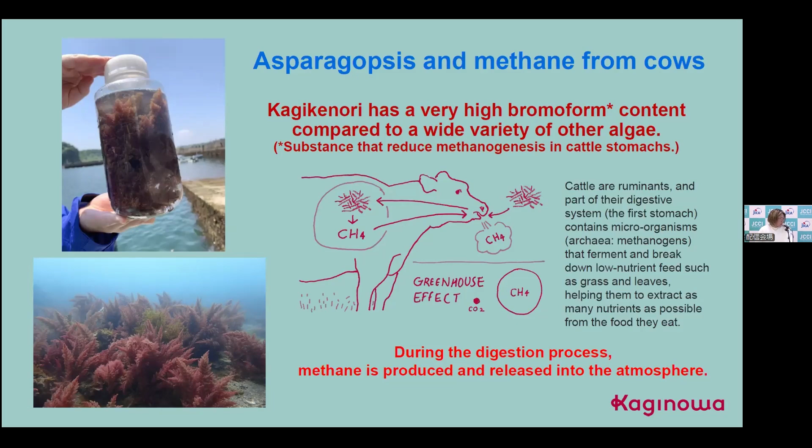So our thinking in terms of kagikenori, the key, is that in social implementation, one cow per day would consume 10 kilograms of food, and 0.2% of this seaweed could be fed together. Then over 90% of methane gas could be reduced from a single cow. This is the data point that we have.

In terms of the in vitro testing, 99% of methane gas could be reduced, and we have confirmed this.

On land cultivation, we are going to expand, and in-water cultivation in Kagoshima Prefecture, Yamakawa Fishery Farm is also conducting underwater cultivation. So with all the fishery people and the community of the region, we could lead to the generation of a new industry.

And for the feed additive for cows and livestock, we have to register it as an additive, and we're in the process of doing so. We'll be able to complete that within this year.

So for methane gas reduction, we've done J-credit. Purchasers of this feed, inclusive of asparagopsis kagikenori, we will be able to pay back. That's the circular system that we would like to create.

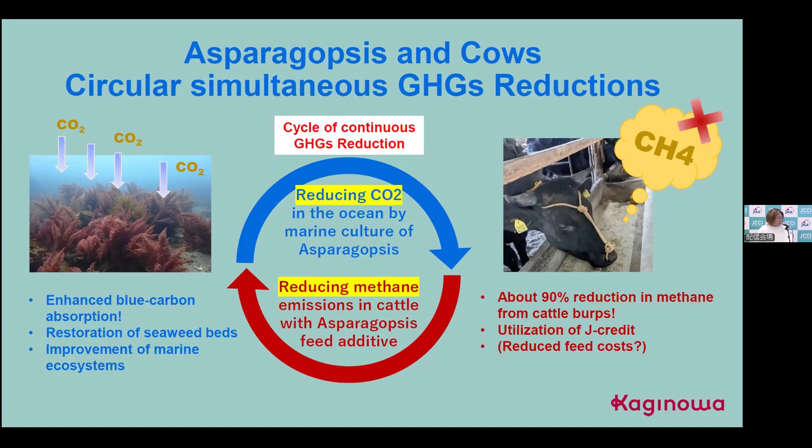So therefore, in culturing kagikenori, first the methane emitted from cows is going to be reduced, and kagikenori is cultured underwater, so CO2 reduction in water could also be achieved. Furthermore, we will be able to revive the underwater ecosystem and the species that live in the water. This is the Kaginowa project, with methane gas reduction within a circular environment, which is what we'd like to achieve.

This is the project that we're working on here in Japan. Our homepage is not yet prepared, but please let us know if you are interested. Thank you very much for today.

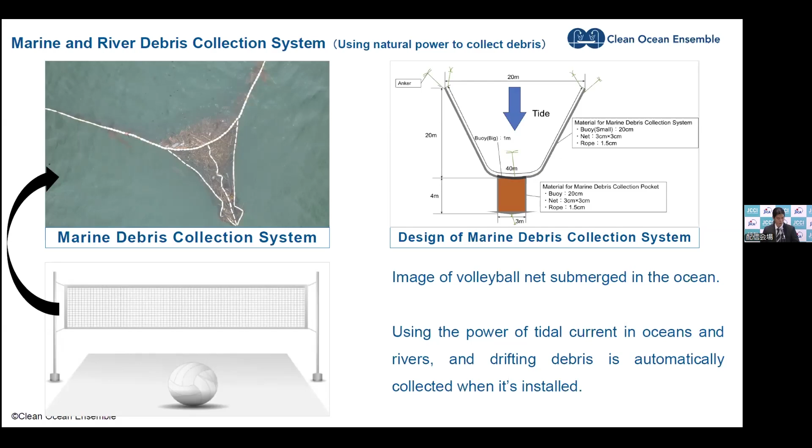In Shodo Island, Kagawa Prefecture, we are working with local fishermen to install the system. In terms of design, structure, and location of the system, we got insight from the local fishermen. Other than beaches where a lot of people gather, marine debris is seen a lot in, for example, unmanned islands, as well as areas where people do not really visit. So by installing the system close to these areas where there's a lot of beach debris, we can collect debris and increase the volume of marine debris collection.

We have also developed a collection system for river debris, which means we can stop the debris from floating from the river into the ocean, which will help increase the volume of collection.

And this is the second solution, which is a marine and river debris map system. Picture of the debris collected, geographical location, and the time, and also sponsor company information are fed back into the system.

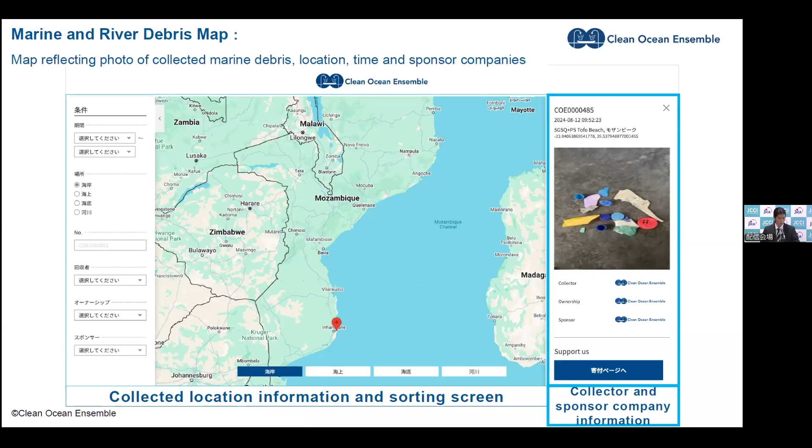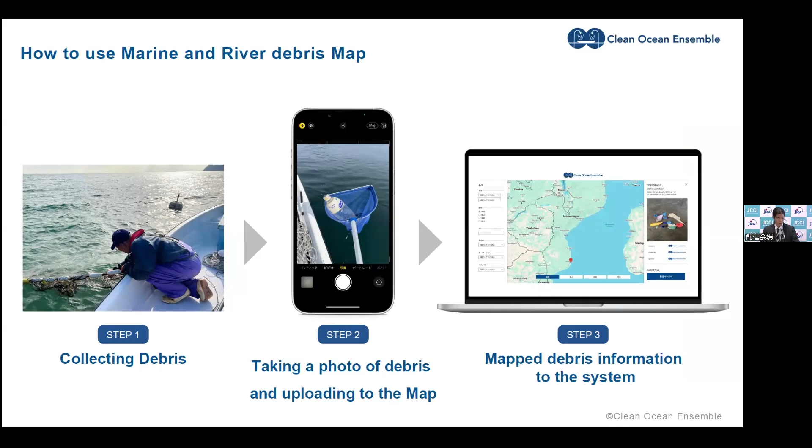It's very simple to use. Only 3 steps are involved. You collect debris, take a photo of that debris, and upload the information. The uploaded photo will have time and location data attached automatically.

Collection efficiency can be improved through this system, because the collection system we introduced has to be installed in areas where there's a lot of marine debris. But we never really had information about where the hotspots are. Sometimes beach cleaners and fishermen collect the debris, but we don't have information about where the debris is being captured and when.

Next, I would like to talk about the business model. A carbon credit type of concept is applied, so certificates of credit can be issued for a charge, and this can be used for financing to increase the number of participating companies. We can incentivize the collection of data so that we can increase the volume of collection of debris.

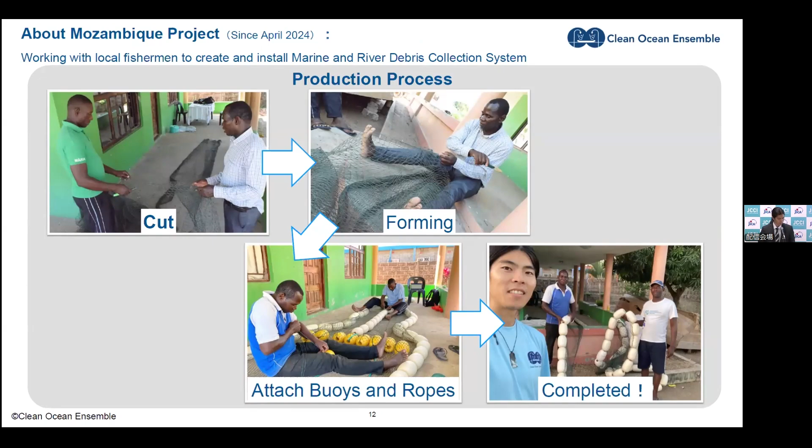So the collection system was designed and prepared with cooperation of local fishermen, and we conducted 2 demonstration tests in the ocean so far. The Ministry of Fisheries provided us with an agreement as well. Effectiveness of this system in overseas applications and also demand outside of Japan were confirmed through these demonstration tests.

We also did this demonstration test in the river as well. We have confirmed that this system worked, and this project was conducted with the cooperation of the local city hall and the police.

Our organization is 5 years old, and we are addressing the challenge with the support of many different organizations and companies for a world with zero marine debris. This is a big cause, and we know that we cannot do this alone. That is why we say Ensemble, together, to tackle this problem. Thank you very much.

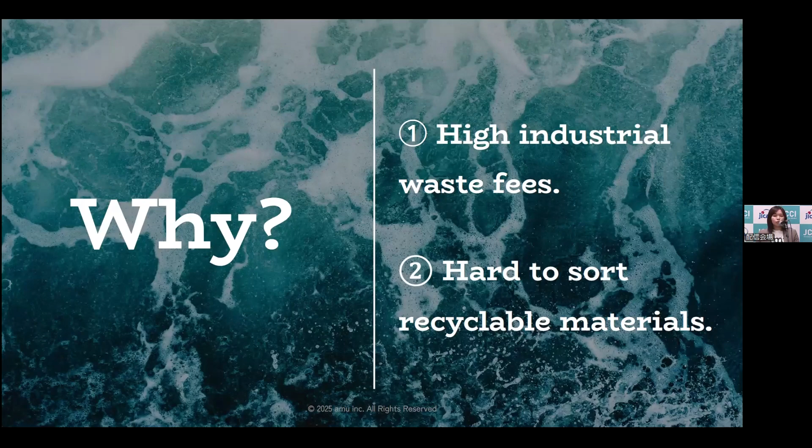So our aim is to tackle this fundamental issue through our business. We are turning waste fishing nets into a resource for the future by purchasing them from the fishermen and then upcycling them.

And here is our team member, including myself, and we are all from different backgrounds and different regions, but we met at Kesennuma City and started this business. Our vision is nothing is worthless, and our mission is weaving a new chapter for the community.

Well, back to the beginning. So how are we turning these waste fishing nets into a resource? Once we upcycle the net, we are developing a recycled nylon material brand called amuca.

And what is amuca? The key feature of amuca includes the use of 100% recycled material derived from fishing nets, traceability of which fishermen's nets are being used in the recycling process, and contributing to biodiversity.

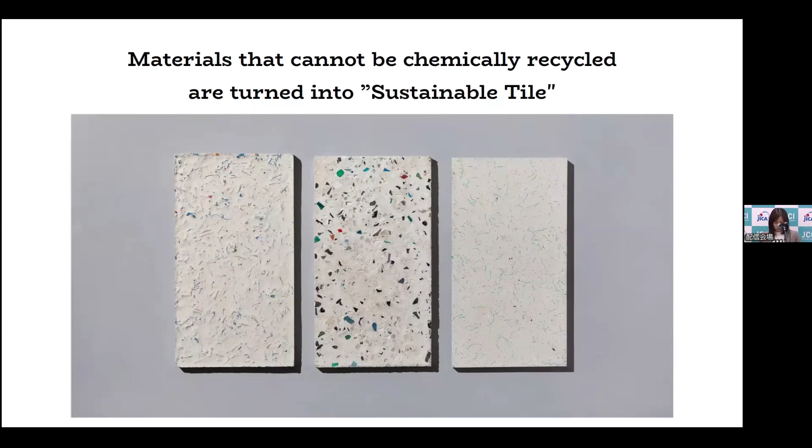So last year, we built a connection with fishing communities around Japan and collected 50 tons of fishing nets domestically. For this year's goal, we want to double that number. So we want to collect 100 tons of fishing nets in Japan, and also put more effort into expanding our amuca sales.

For 2026, we are aiming for a further increase in our collection volume to 300 tons a year. And we also want to go globally, starting fishing net collections overseas.

As a startup, currently we are in the seed round, and we are now seeking passionate individuals to join us to accelerate our business. Whether as a partnership or as part of a team, we welcome those who share our vision to get involved.

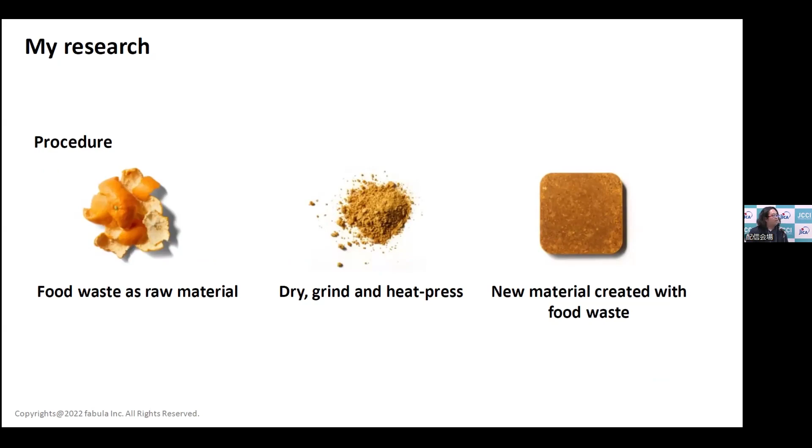This is our technology. It looks really simple from this slide. We get food waste as a raw material, and we basically dry and grind that into powder, and then we use something called hot press, so heat and pressure are applied. This is a very traditional, old-fashioned technology, but by using the hot press technology, we can create new materials.

These colors and fragrances can be taken advantage of to create a new creative space. So we want people to realize that food waste is actually very attractive as a source for materials.

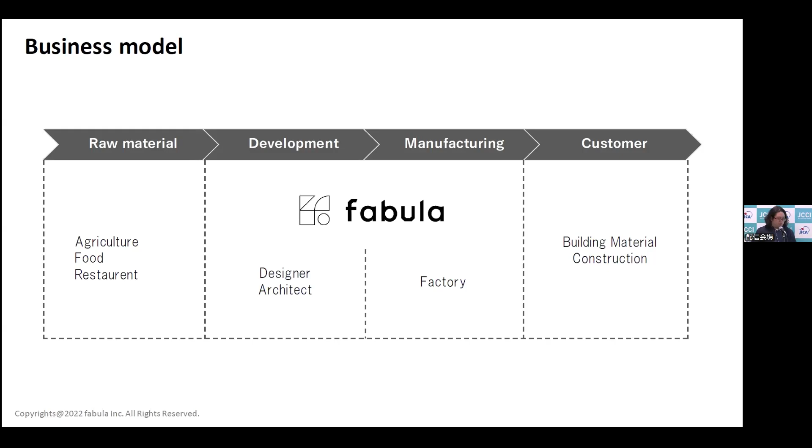Food waste, when it's transported, would emit additional CO2, but we can avoid that by using local waste and turning it into materials that can be used locally. We have factories in Kansai, Hokuriku, and different parts of Japan, where local waste can be turned into new materials. So that's the business model we are pursuing.

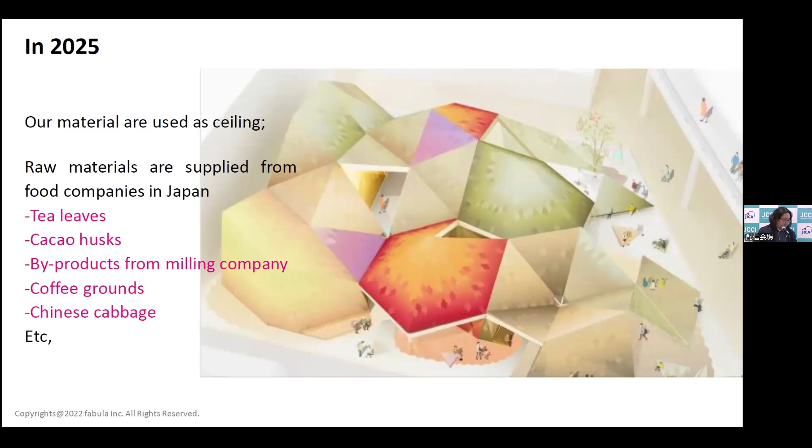We'll be using tea leaves and cacao husks and other materials, and they'll be used as a roof or ceiling material - value-added ceiling material. Also in Italy, together with Mitsubishi Jisho, and also in Dubai, we are building structural materials together. Karimoku Furniture Company is also working with us. We produce some interior goods for Milano Salone. So our products are gradually being introduced to markets outside of Japan.

Exhibits in Italy and Dubai are captured in our Instagram photos, so please take this opportunity to follow us and enjoy the pictures we can show you on Instagram. Thank you for your kind attention.